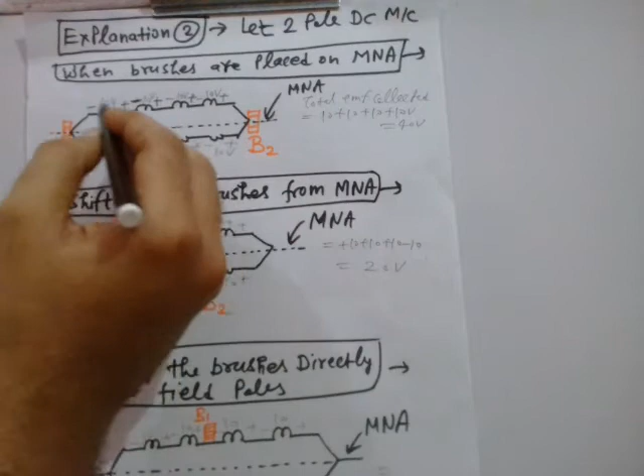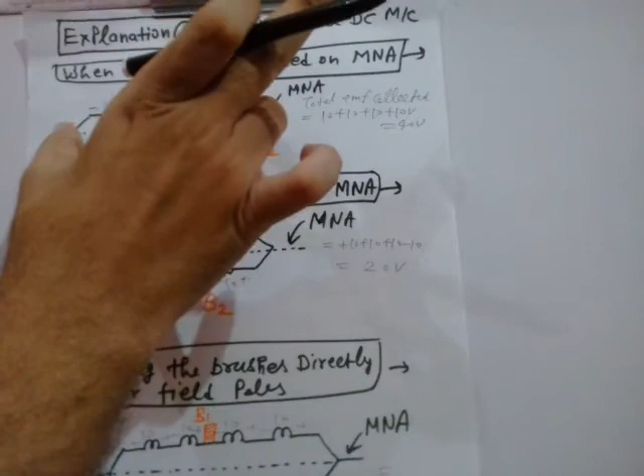So these four are the coils which are connected in series. So now the voltage drop across every coil is 10 volts. So polarity is minus plus, minus plus, minus plus, minus plus, like this. So if you take total voltage across any of these parallel paths, then you will get 10 plus 10 plus 10 plus 10, which is 40 volts.

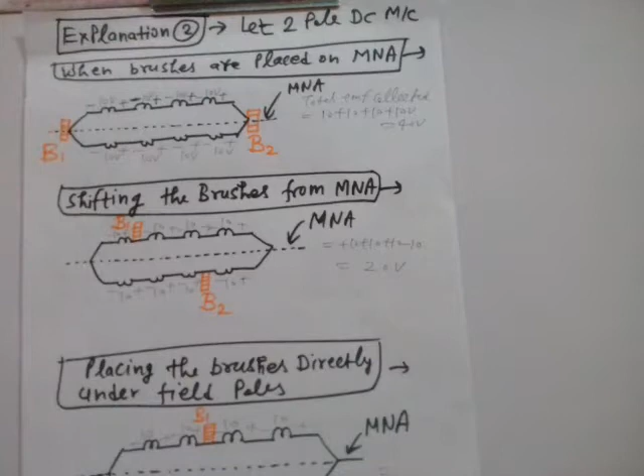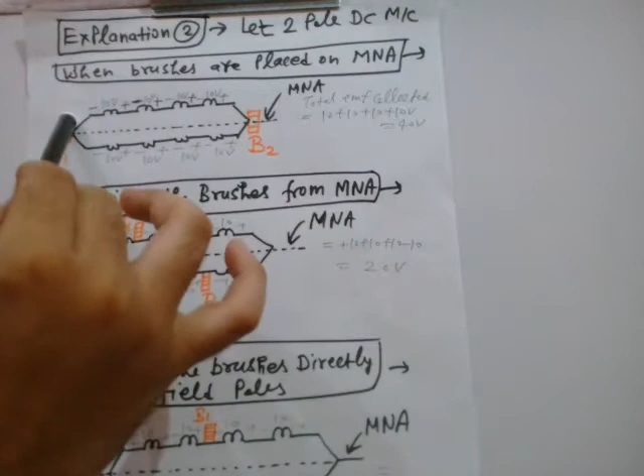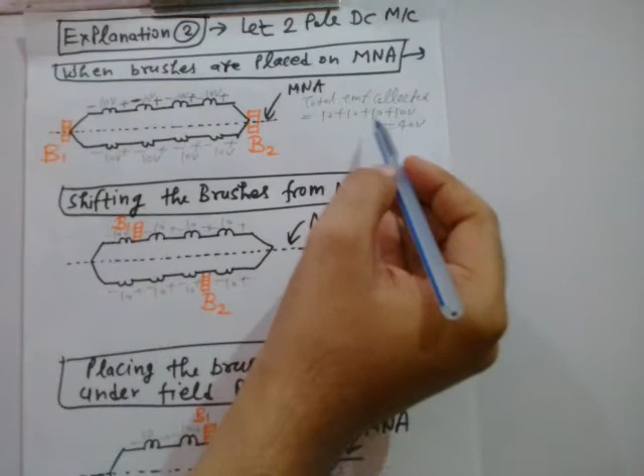So this is under the condition when brushes are placed on magnetically neutral axis. This is the magnetically neutral axis, and B1 is the first brush, B2 is the second brush. This horizontal dotted axis is the magnetically neutral axis. So here you get 40 volts. This is the maximum EMF that is collected under the condition when brushes are placed on magnetically neutral axis.

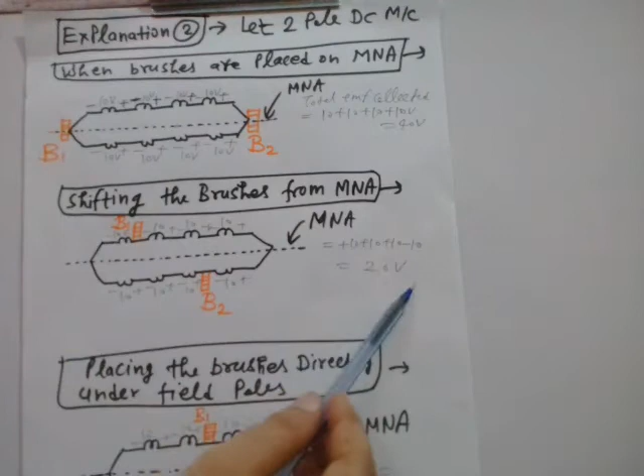Now if you shift the brushes, that means if you shift this brush here and this brush here, then if you calculate the total EMF collected, you will see plus 10 plus 10 plus 10, total 30, and minus 10, that means 10 plus 10 plus 10 minus 10, which is 20 volts only. So this is the condition when you shift the brush from the magnetically neutral axis. You can analyze that your collection of EMF has now been reduced.

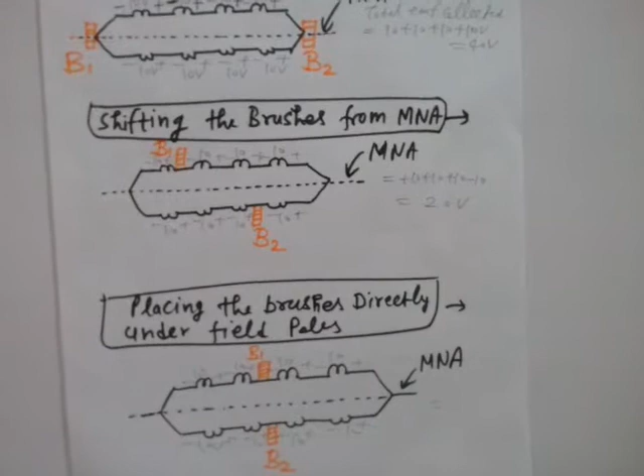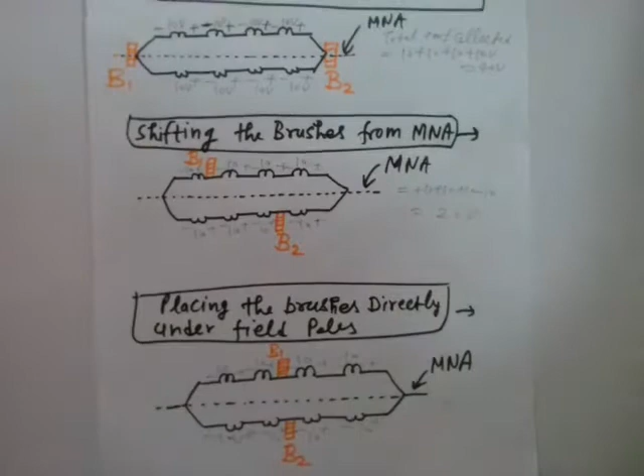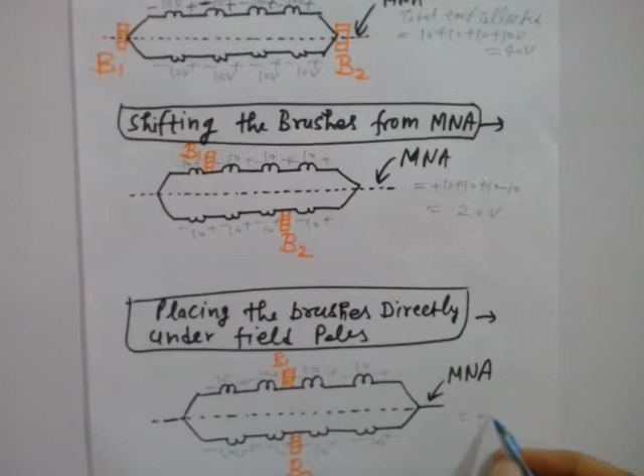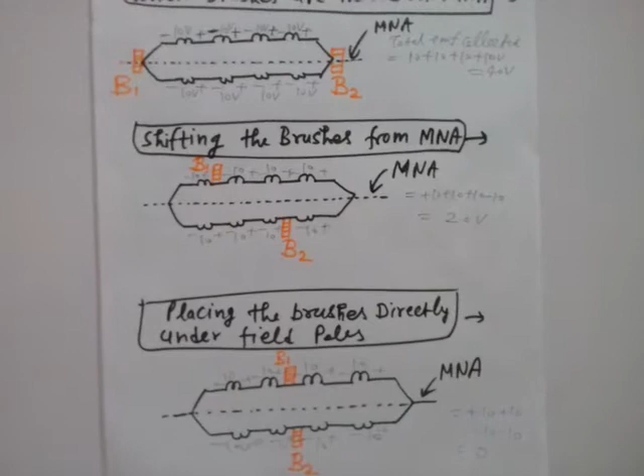Now take the third case in which we are placing the brush directly under the field poles. In that case, if you analyze the maximum EMF collection, you will see plus 10 plus 10, minus 10 and minus 10. So if you analyze now, you will see that in this case the maximum EMF collection is exactly 0. So if you place the brushes directly under the field poles, the EMF collection will be 0.

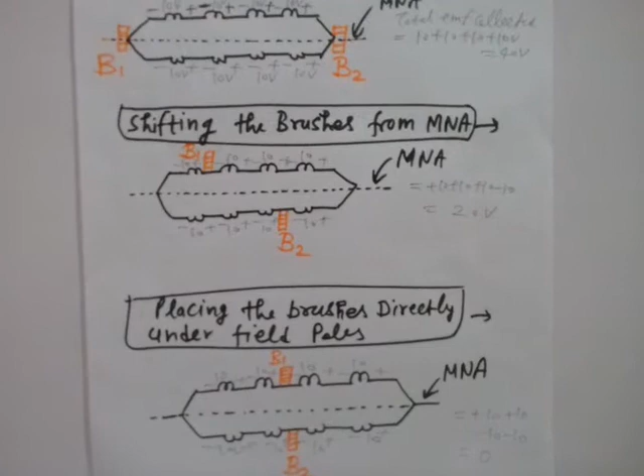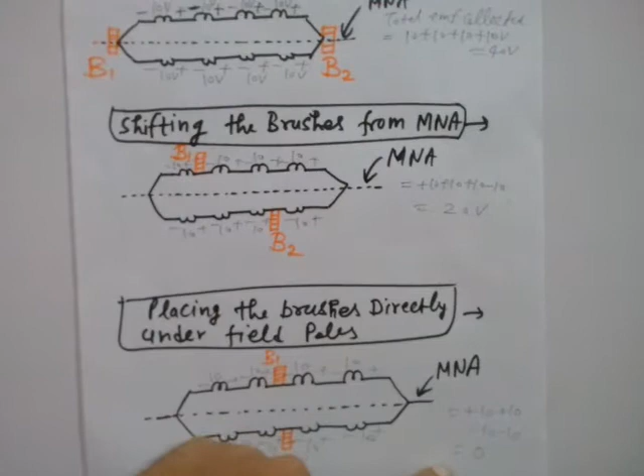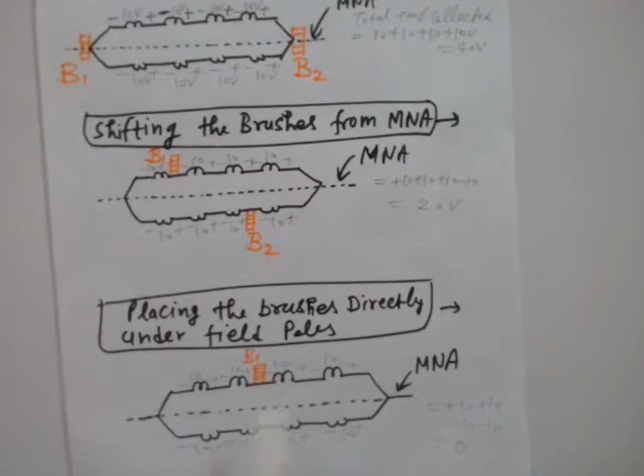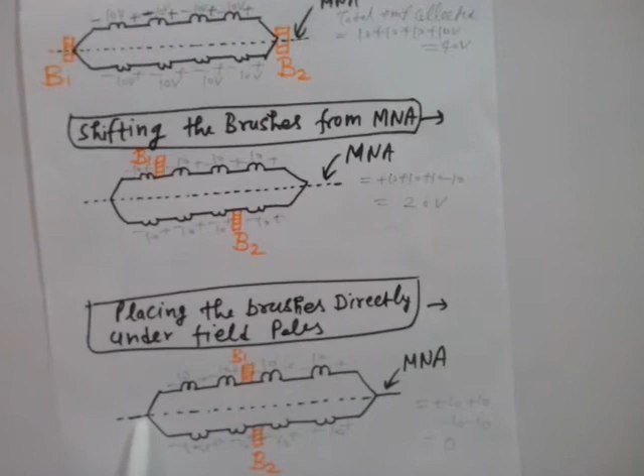That means as you are moving the brushes towards the field poles, your collected EMF is reducing gradually, and if you place the brushes directly under the field poles, you will get 0 EMF collection. So that means if you move the brushes away from MNA, magnetically neutral axis, your collected EMF reduces, and if you place the brush directly under the field poles, you will get 0 voltage. This is at the position farthest from the magnetically neutral axis, at which you get zero voltage collection.

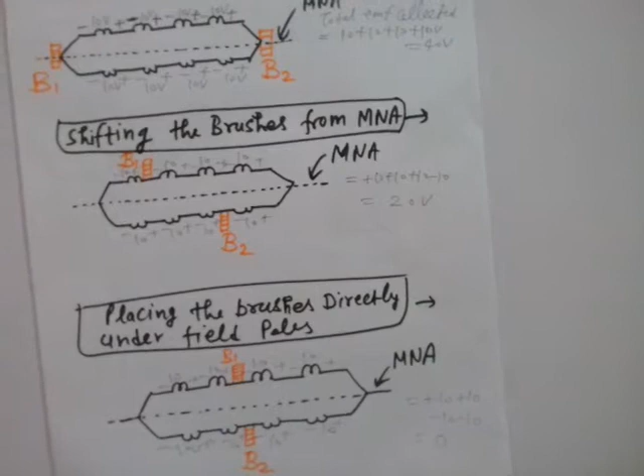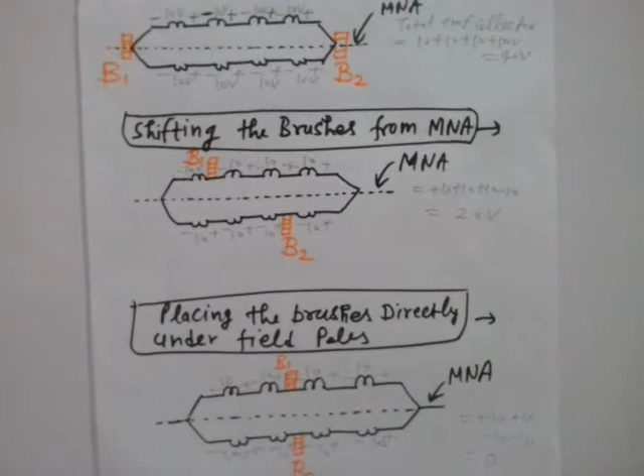Zero voltage collection. So the conclusion is that you should always place the brushes directly on magnetically neutral axis. If you do this, the collected EMF will be maximum, and that's what we desire, to collect the maximum EMF or maximum voltage.

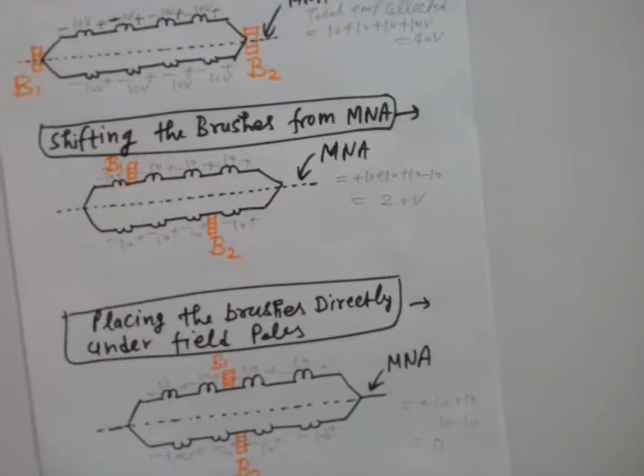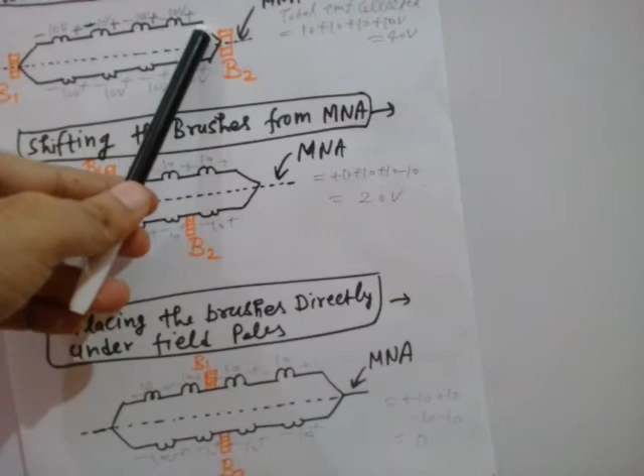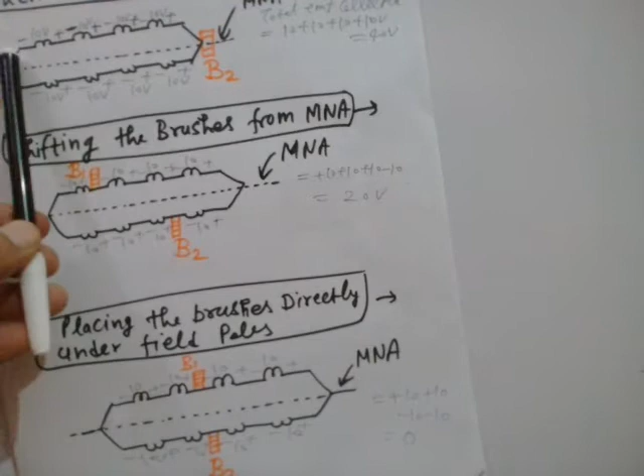Now regarding this polarity, you might be thinking I am assuming minus to plus. Across every coil I am assuming minus plus like this. Why not plus minus? See, if you do plus minus, you will still get some numerical values, but for simplicity, I am assuming the polarity minus then plus. If you do like this, you will get positive voltages, and it will be easier to analyze.

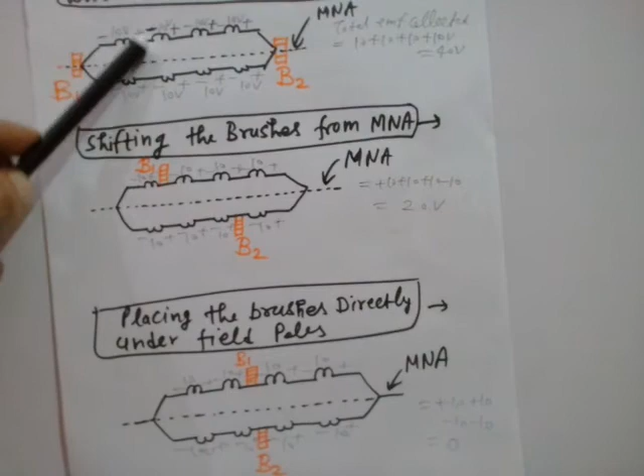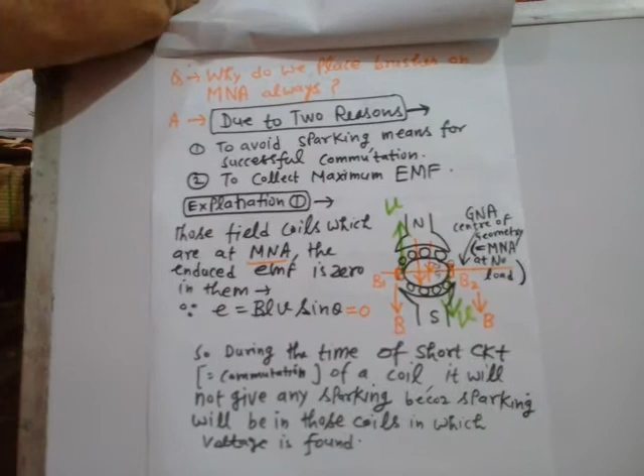So this is the second reason. The first reason I have already explained, why do we place brushes on MNA. The first reason was in order to avoid sparking, we will place brushes always on magnetically neutral axis. So I have already explained this.

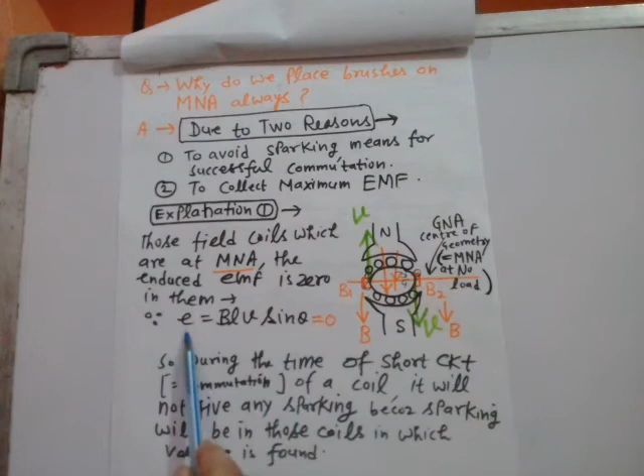By e equals BLV sin theta, where e is EMF or the rotational voltage, for all the coils which are near this MNA, magnetically neutral axis, the rotational voltage e will be 0. The coils which are at magnetically neutral axis, the rotational voltage will be exactly 0. Because what is the angle between B and V? It is either 0 or 180, so sin 0 or sin 180 becomes 0.

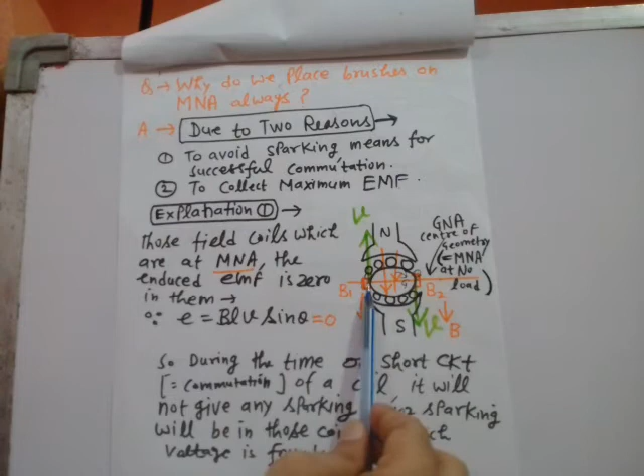So there is no rotational voltage across those coils which are directly placed on magnetically neutral axis. And conversely, you can also say for all the coils which are going away from magnetically neutral axis, they will definitely be having some rotational voltages.

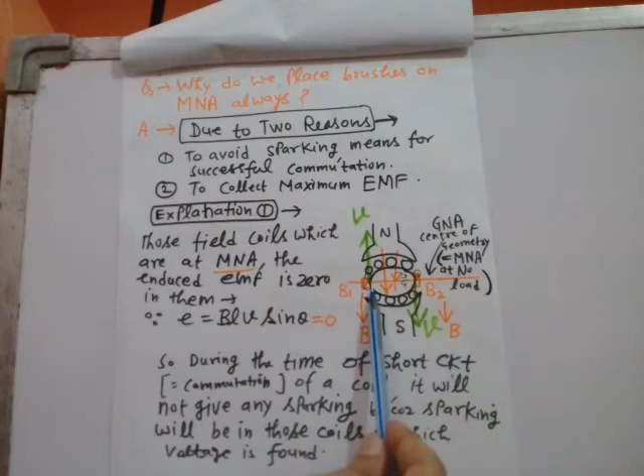So that's why if you do not place these brushes on magnetically neutral axis, then during the time of commutation, the coil which will be having rotational voltage, being away from magnetically neutral axis, if it crosses this magnetically neutral axis and comes under the influence of another pole, then due to short circuit at the time of commutation, it will definitely give sparking, because it will be having some voltage, since this coil is away from magnetically neutral axis.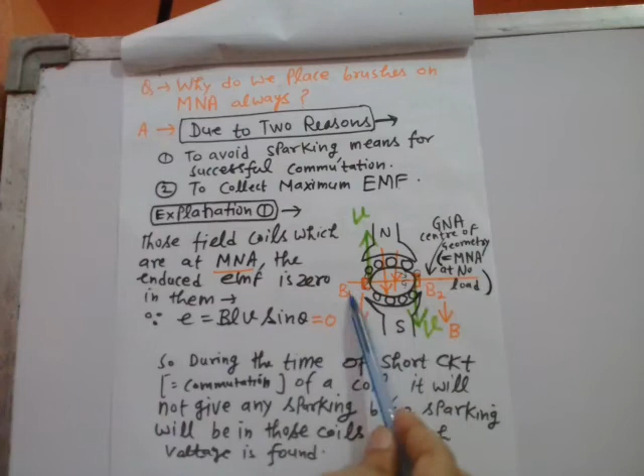So for all the coils which are at MNA, magnetically neutral axis, the rotational voltage is 0, and for those coils, if they cross this magnetically neutral axis and come under the influence of another pole, then during the commutation, during the short circuit, they will not give sparking because they have 0 voltage. This is possible because you have placed the brushes on magnetically neutral axis.

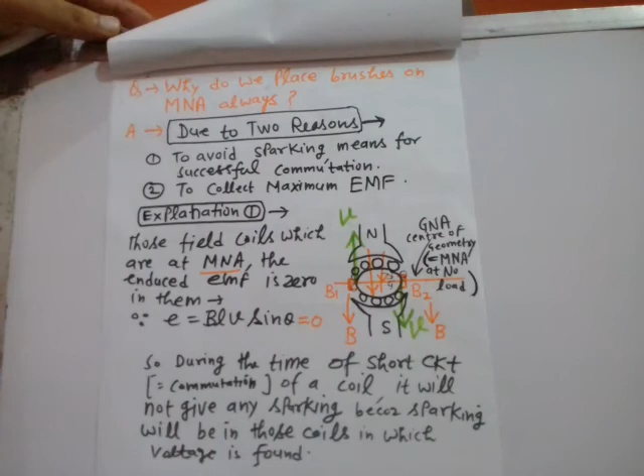So that's why we always place the brushes on magnetically neutral axis. So basically the brush axis is the magnetically neutral axis, or you can say the magnetically neutral axis is basically the brush axis across which you always place the brushes. Now when the load is applied, when the load is connected, how this MNA changes, we will explain in armature reaction. So right now it is important to understand that we always place the brushes only on the magnetically neutral axis.

First reason, why? First reason, to avoid sparking, and second reason, to collect maximum EMF, right? Now...